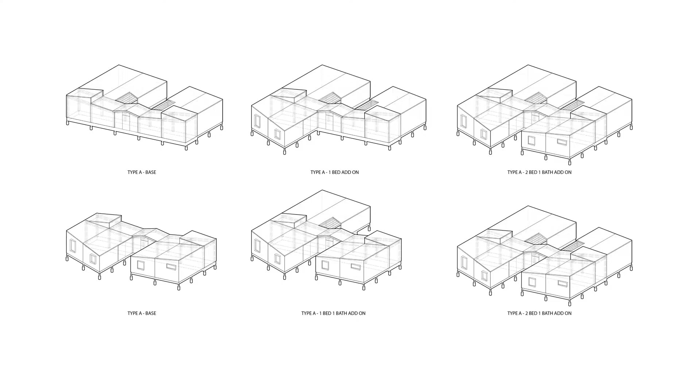Our mobile aggregates function as a post-urban nomadism within this new economic model, allowing for residents to migrate, upsize, and downsize as needed. Housing assets are no longer tied to land, but rather are invested in a system of post-climate urban living. The system is self-sustainable across a variety of environments, water scarcities, and site limitations.

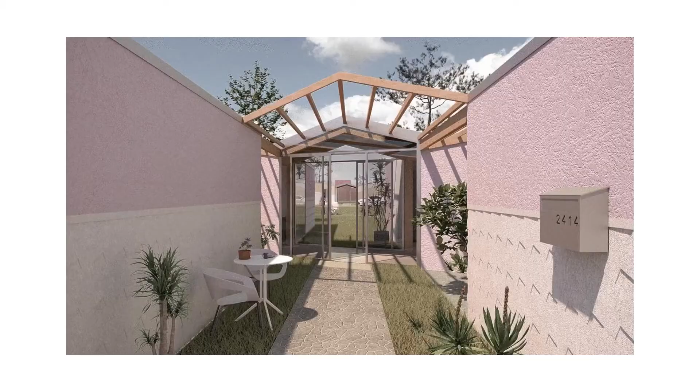Site-specific breezeway enclosures allow for varying degrees of public-private thresholds to be produced, recalling the American vernacular dog trot typology. Roof envelopes give residents the agency to customize their unit's breezeways.

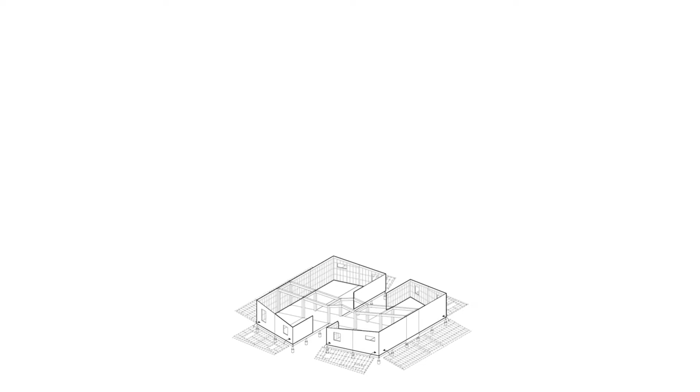The module builds itself off a chassis that becomes the infrastructural and spatial spine of the unit, housing MEP, HVAC, and a water cistern. The unit massing is constructed with the focus on the positioning of figuratively assertive outdoor spaces. The chassis becomes the anchor from which expansion may occur.

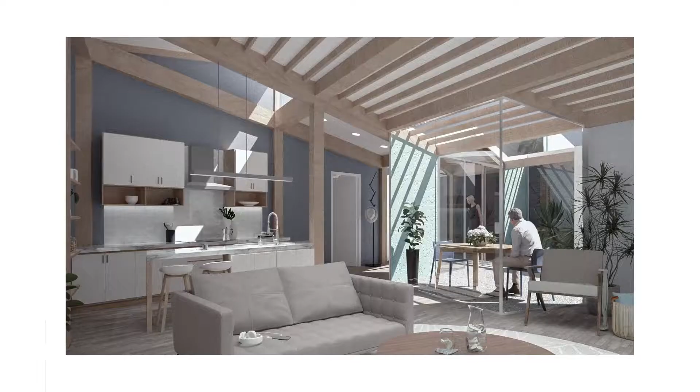The sectional shift along the roofline of the chassis allows for light to be brought into the periphery zones along the spine. Private moments of exteriority bleed inside through the intersection of the breezeway and spine of the module, expanding the traditional delineation between the domestic unit and its yard.

The ease of construction needed to deploy the modules allows for the gaps of urbanism to become the staging area for construction, with those same areas later remaining open as the communal zones across our sites.

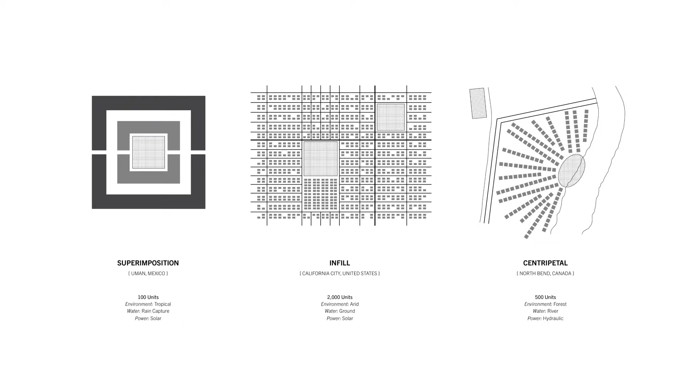We believe that climate refugees will seek out cities connected by existing transportation routes that offer development infrastructure and socioeconomic opportunity. Three dichotomous sites situated in Mexico, the US, and Canada function as testbeds for the deployment of resettlement communities, each of which produces substantially different spatial and social configurations.

In Uman, an exurb outside of Merida, Mexico, our aim is smaller community settlements of around 12 units in repeatable blocks. Blocks in Uman are built up at its periphery, with the central zone remaining underutilized and often inaccessible to the broader community. The project's urban effects are supported by visual connections through modules and their breezeways.

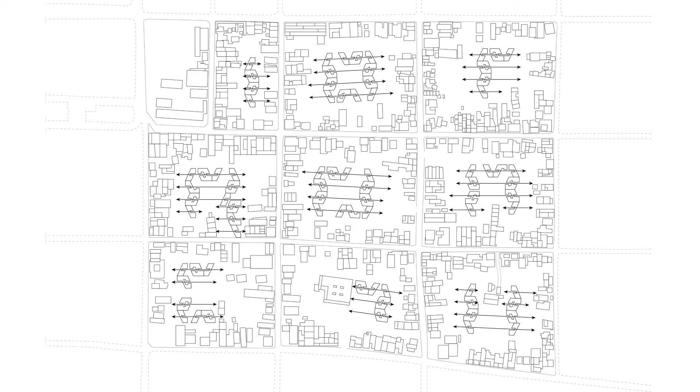Visual bisections through the spine produce private domain and public benefit concurrently. The multi-axial nature of our module allows for positioning to adjust to the existing context, aligning and snapping to adjacent urban thresholds in a superimposed block.

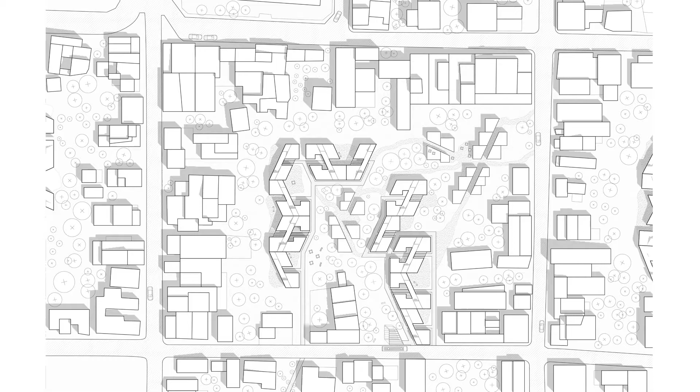In order to sponsor economic opportunity for these NAFTA migrants, we speculate on the conditioning of open zones magnified by the modules to become an asset to the communities.

California City, an exurb outside of Los Angeles, has the potential for the largest agglomeration of units through infill urbanism. Different scales of community zones are produced, including large community parks, parkettes, and shared courts among units.

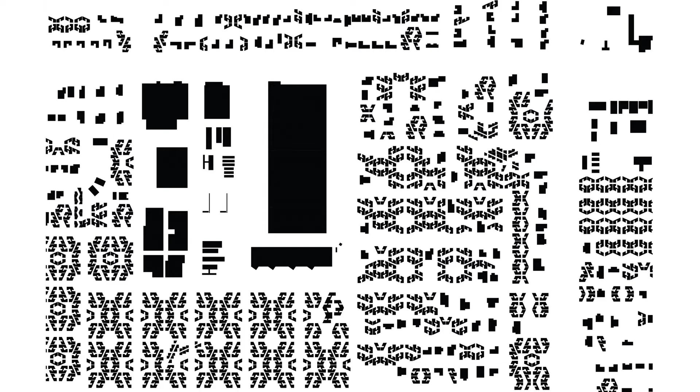Aggregations here depend on line of sight to break down the superblock, allowing for porosity and perforation through an otherwise dense urban condition. Urban and community planning strategies are used to produce axial ties between industry and housing that remain separate urbanistically.

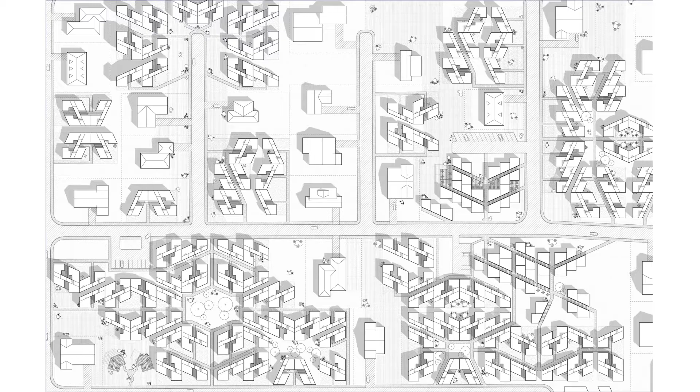In contrast to the orthogonally aligned existing residential homes, the module set's diagonality allows for visual as well as physical slips into and through neighborhood blocks, producing a sense of parallax.

The site in British Columbia is imagined to be a series of repeated clusters in low-density towns like North Bend. The centripetal organization strategy here sponsors a figure-ground relationship of the site that deviates from normative housing strategies and instead places emphasis on access to community zones.

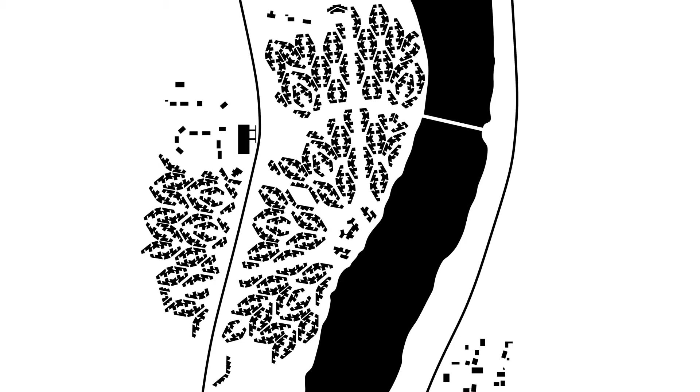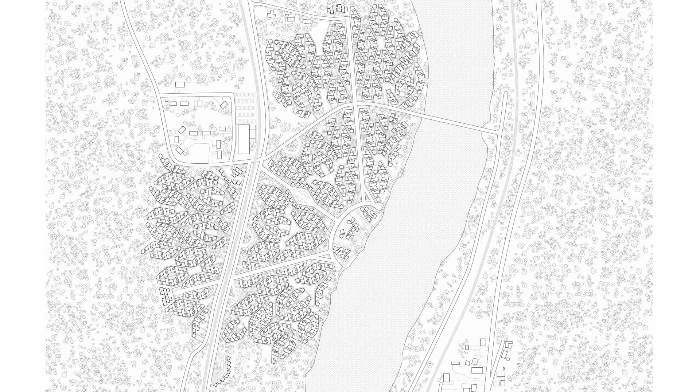Lines of sight, originating off of the main axes, permeate deep through layers of units and pocket communal zones embedded within the grid. An axial tie is established from a community node that hinges from the river across housing arrays to the existing train station and its related economies.

This gives us the opportunity to create a more expansive and interconnected system with pocket communities that retain equal access across public, semi-public, and private zones.

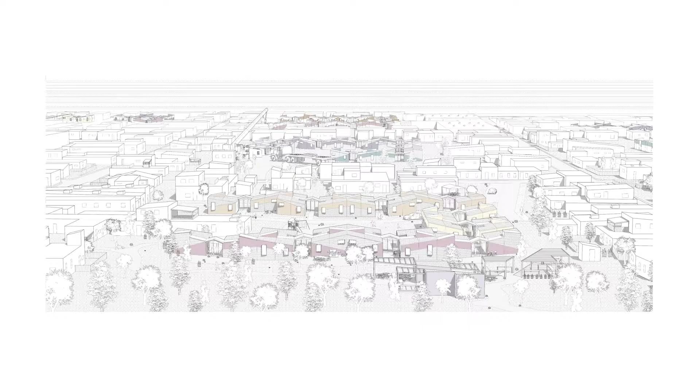Structured and visible lines of sight become the spatial organization strategy that modules are deployed with across all three sites. Visibility through the spine is coalesced with figural zones between units, thus operating as a mode of fractal expansion.

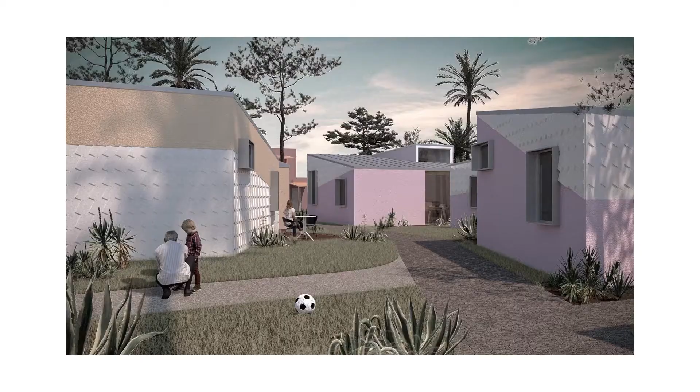Through the use of exterior pattern and color application, a more contingent relationship is made between the units and the ground plane. The angled orientation of units places emphasis on interstitial zones between them, left decidedly open and receptive to spontaneous forms of public life.

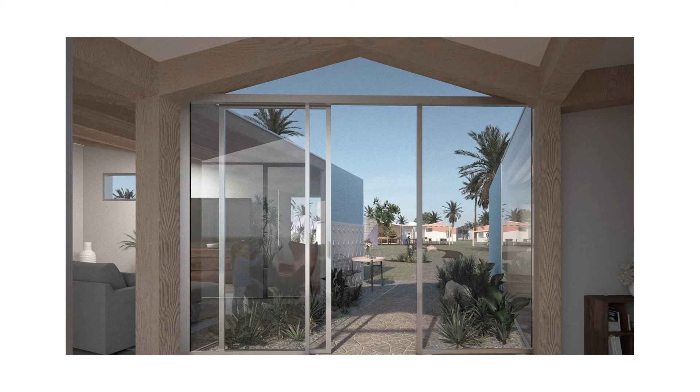Units' axial alignment along the breezeway ensures permeability between the existing community and proposed units. Units qualitatively encode visual continuity across spatial collectives, extending beyond norms of prototypical housing typologies.